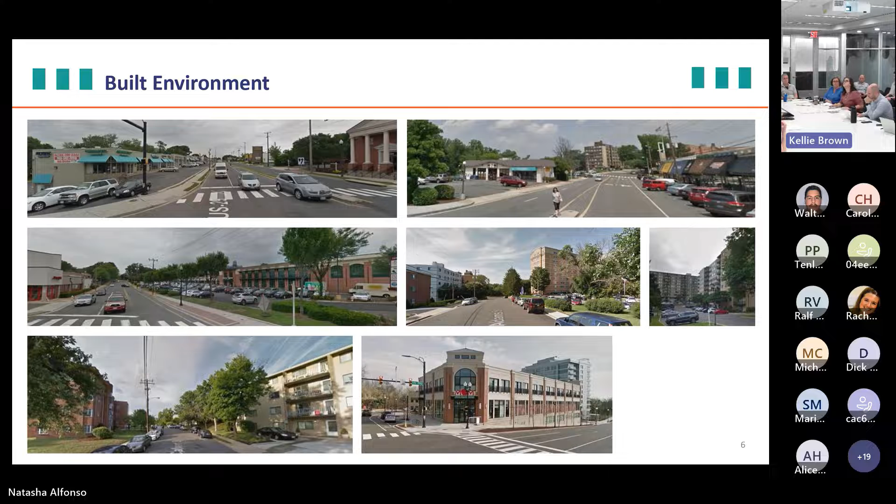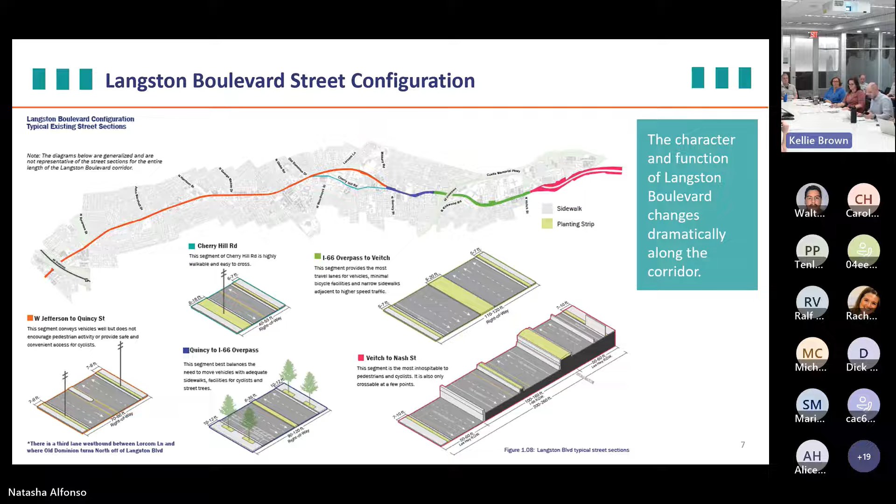There are several locations, though, where you can feel that auto orientation, that auto-forward built environment, which is one of the significant changes we would like to make over the next few years. Just by looking at the street, Langston Boulevard, from one end to the other, you can see a variety of different conditions, from almost an expressway condition in the east to very narrow roadways.

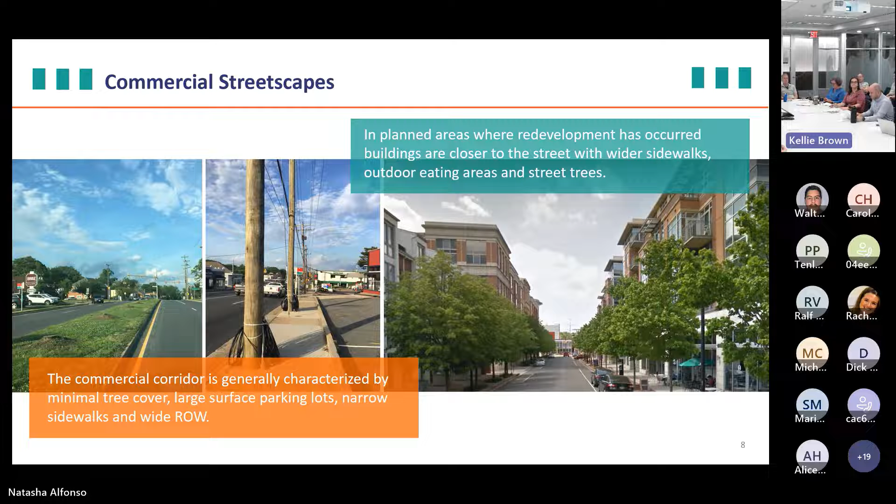And for pedestrians in particular, one of the most important constituent groups for us in this planning effort, there are a variety of conditions, but many of them very challenged. Now, we do have some examples to build on, like Westmoreland Street on the right, where there's a good example of a pedestrian-oriented environment that facilitates ground floor commercial and new residential dwellings. But on the left there, you can see those conditions that we're working with to try and change.

The residential neighborhoods along the corridor are actually quite lovely, right? The places that people live today are wonderful, tree lined, and there's lessons from those neighborhoods we want to bring onto that commercial corridor. Although there are some neighborhoods that have a lack of connectivity between them that we wanted to change, especially in Area 5.

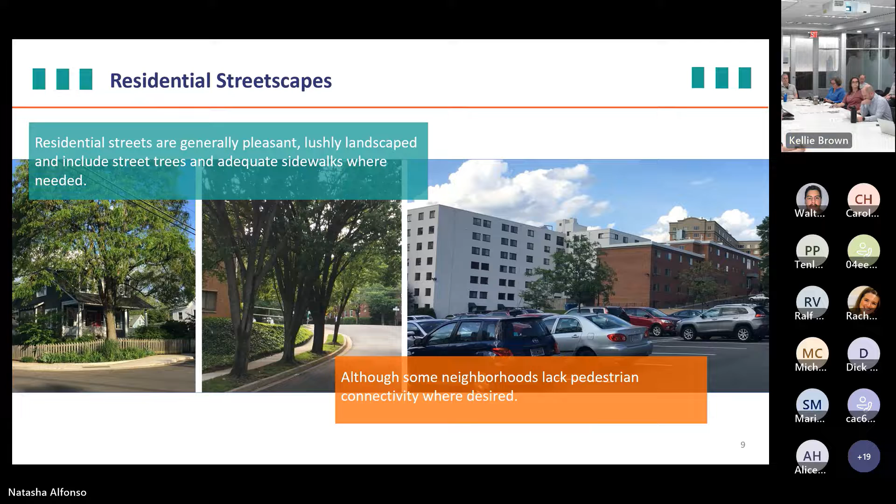So part of the process was to map the barriers or the disconnects within the public network. There's a great series of public parks just off of the corridor already, but there was a lack of connectivity along the corridor and across it, preventing people from taking advantage of those existing resources.

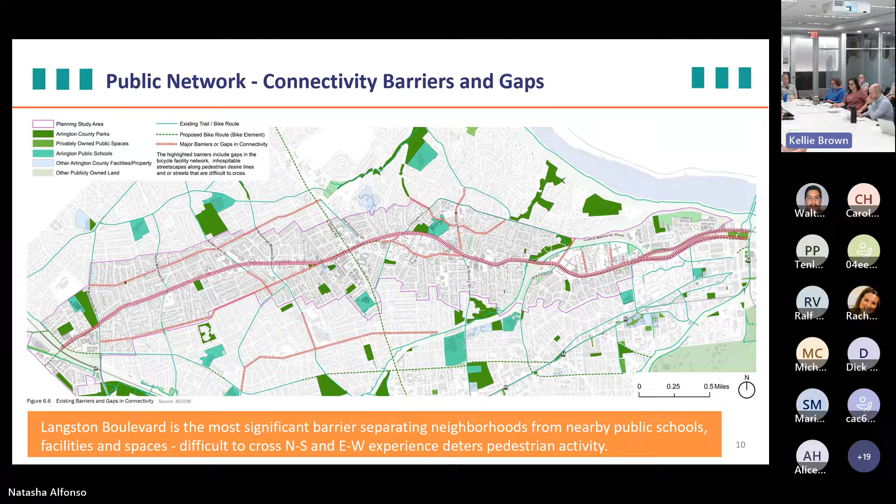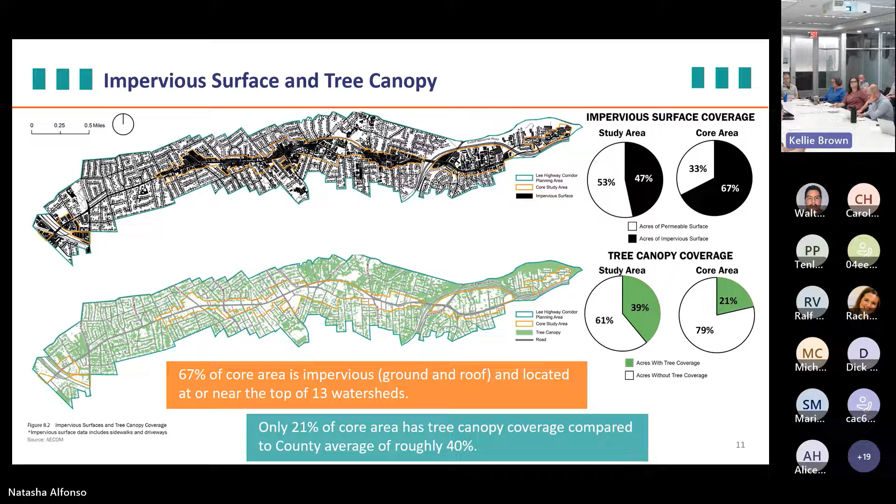As you move through it, you can see the significant amount of impervious coverage within the commercial property, and that causes several different types of challenges for our sustainability goals. Those same locations have very little tree canopy, and we wanted to make significant changes there. It's going to take the development, the redevelopment of that property to make that happen.

We were working with the staff to understand where the flood risk is along the corridor and how that tree canopy, or the lack thereof, and the presence of those impervious surfaces are exacerbating the flooding challenge.

All right, it's asking me to do a few things here. It wants me to hold on a little bit again. Just a few moments, folks. We'll see if this reconnects. Think happy thoughts.

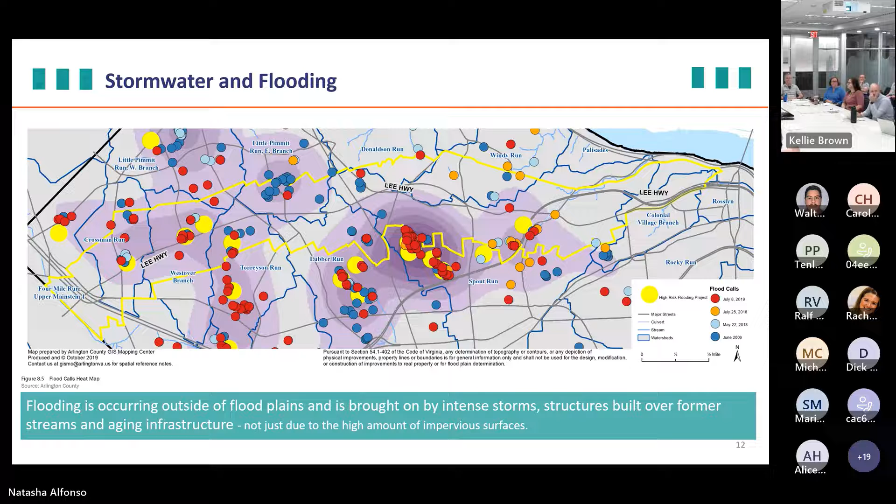Okay, it looks like it knocked this out. Trying to reconnect. We're going to try to open up SharePoint.

There you are, I see you now. Do you know where it is? No, okay, go to meetings all the way down to public, then LRPC. You're in phase 3, right? LRPC right there, 725, and it should be the last one, the PowerPoint, that one.

What should we do? We'll have to just take them to advance it.

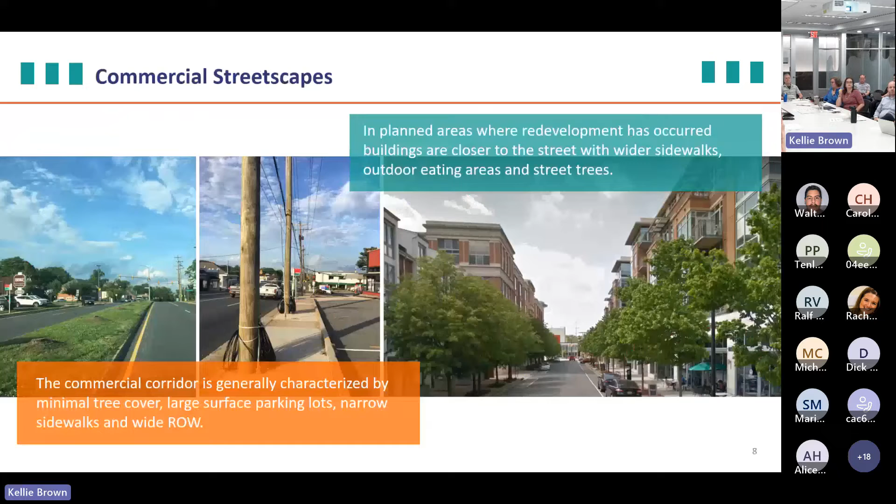One of the important things to keep in mind, and one of the motivations for the entire planning effort, is that by-right development is not resulting in the changes necessary to see realized, whether that's the lack of housing diversity, the fragmented streetscape, or the continuation of impervious surfaces. It's important to incentivize redevelopment outside of the by-right process in order to see those goals realized. So to proactively plan for change, the area plan guides those improvements and decision-making for new buildings, site improvements, and other infrastructure, and looks to incentivize development that can help transform Langston Boulevard into that walkable, sustainable urban Main Street environment we're looking for.

And to realize those county goals - affordable housing, biophilia, safety, transportation, public access, and racial equity - there are 9 different planning elements that have their own policies and recommendations associated with them. We're going to be focusing on the built environment component in this meeting, land use through historic and cultural resources.

There are design principles and guidelines also included in the draft area plan. The idea there is to provide guidance for how to do the recommendations and how to achieve the development that's talked about in the principles. Those guidelines for the public realm and the built environment are a set of recommendations for how to apply those design principles.

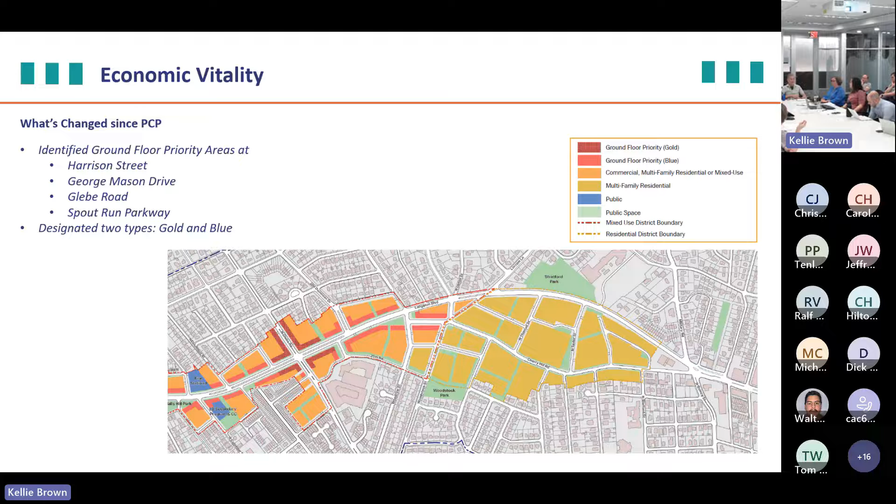So will this just be for a little element that comes in, or will it be not for by right? No, it gives an incentive that we don't have to do by right.

Let's hold on one second while we try to get back into the meeting. Now we're back? Are we back? Elizabeth, can you hear us? Michelle, can you hear us? You're back, okay, thank you.

Okay, we did not discuss anything substantive when we were kicked out. Ginger had a question. I think you're here as a commission. No, okay, never mind, Ginger. You're not allowed to, you're trying to sneak in.

Still have comments at the end. Okay, you'll have a comment. Yes, ma'am. Yeah, it just, again, recognize that concern, and it probably is a countywide policy of how to actually encourage small local businesses. I mean, that's the broader issue.

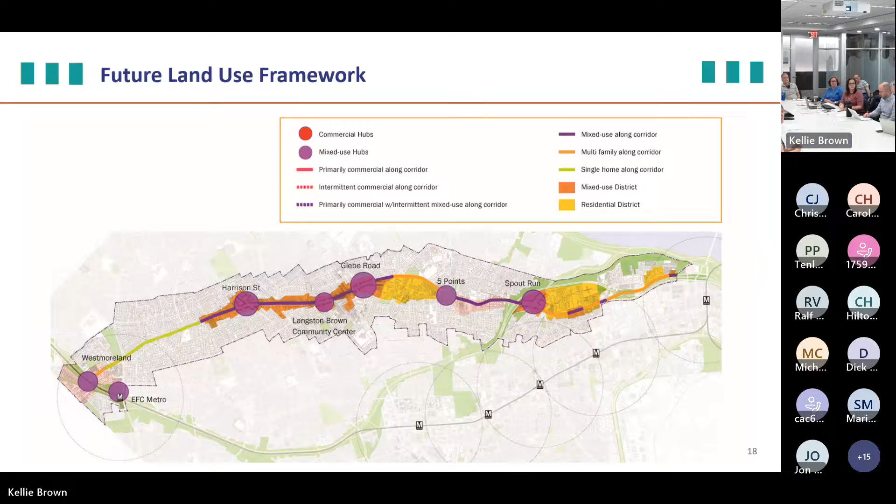All right, so we're going to focus on housing now. It's visible, right? Everybody can see the tiny little thumbnail slide. Yes. Okay, all right, and hopefully when I articulate on the screen there—

The policies on housing in the plan really focus on increasing housing choices and supply, particularly committed affordable units. The primary recommendation is to encourage or concentrate residential development in the core by allowing residential in commercial areas, which we know is not allowed today, and by increasing densities throughout to increase the supply of housing, particularly multifamily. I know we've said that a couple of times, but that is the key.

The plan sets policies for increasing committed affordable units, which are units affordable to households earning up to 60% of the area median income. This can be achieved a number of ways, including redevelopment and infill of sites that have existing CAFs on them, through renegotiated agreements to extend the terms of those existing CAFs along the corridor, and through the conversion of existing MARKs to CAFs. And as we know, MARKs are pretty vulnerable.

Many are in aging buildings that at some point may be renovated or redeveloped, and even if that takes a long time or happens over a number of years, in both cases changing those units will lead to rents increasing and no longer being affordable to those households. Another way is by incorporating new units on historic sites designated for full or partial preservation. Lastly, the plan establishes a policy to accommodate renovation of aging residential buildings in order to sustain those MARKs, at least until property owners choose to redevelop or take advantage of the options available under the plan.

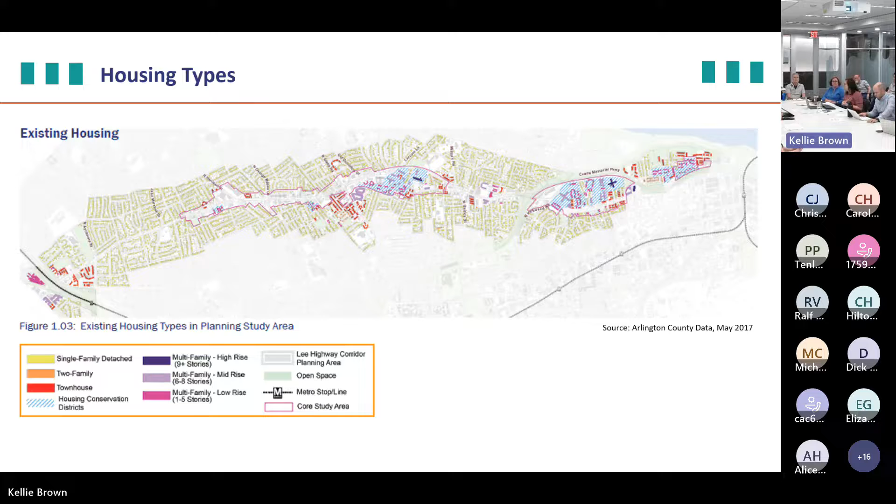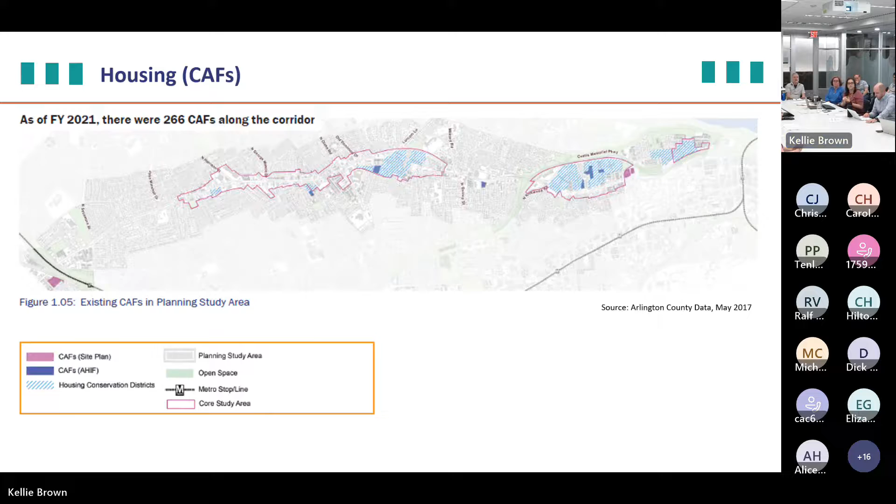So with that, we have a couple of maps. Kelly, if we can, sorry—just scroll through them. They provide some context of what's existing along the corridor: this is the housing types, then the MARK and CAF units along the corridor, and then one more showing the breakdown of multifamily units along the corridor—which are apartments versus which are condos. So if we need to refer to that, we're up here.

All right, questions—this is a hot-button topic, I'm sure. I've got to go to my friend Nia here.

In the more highly developed corridors of the county, we struggle when developments come in with the site contribution, the cash contribution, or on-site units—it sometimes seems to be a losing battle to get on-site units. At least up until now, historically, from what I've seen in the county—maybe not on Langston—but the developments that come in usually are market rate. We've seen that on Columbia Pike. My concern is how we're planning, especially if we're talking about equity. Equity is not going to be achieved unless there's a lot more affordability; it's not going to happen. So my concern is that we haven't been able to achieve this in places in the county—so what makes us think we can here, or what is it about this that's going to enable us to achieve it better?

Because my concern is that at the end of the day, they can still make a cash contribution in lieu. That's an important component of the affordable housing program within the county, but it doesn't serve the purpose of getting more affordable units into that corridor to achieve the goal. Right.

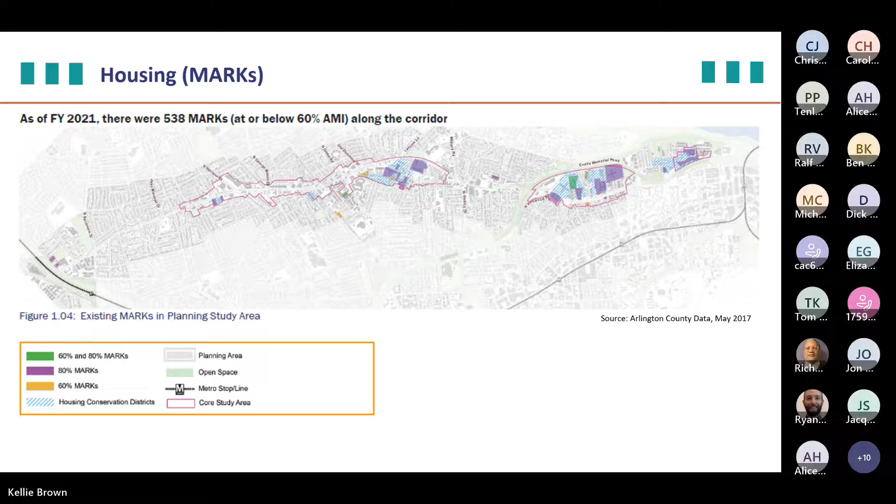It's me again, I just have a question. So the affordable residences, condos in the target areas, when they renovate, what measure is in place so that the poor people who are currently there aren't pushed out? Because renovation costs a lot of money, and if people come in and start throwing money around, they expect a big return. So monthly fees, something's going to go up somewhere.

Excellent question, and that's the type of thing we're going to have to sit down and figure out. If we want to preserve these affordable ownership units, we should figure out some new programs. Absolutely.

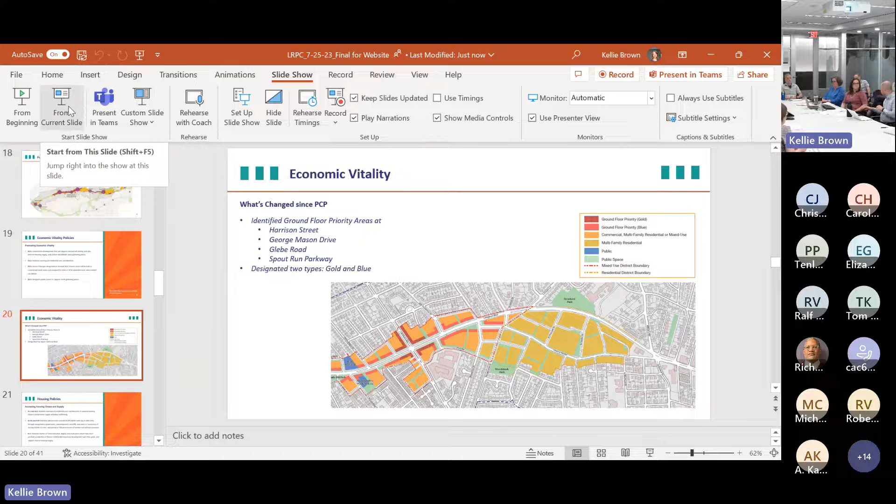Eric, I have a couple questions, very quick. Tasha, this is probably you. In the recommended land use changes, I think this speaks to some of the preservation conversation. There's a note about maintaining the low-medium residential designation in certain locations. From what it sounds like, where we already have this low-medium housing, we want to just maintain it. I think it speaks to the conversation we were having before about incentives. We had this on Columbia Pike three and a half years ago when we were looking to maybe change the form-based code, where there was a concern that if we allow more density, we might incentivize the current owner to say, great, it's time to cash out. Is that sort of the idea here, that what's close to market-rate affordable, we just want to leave as is?

It's a good question because it really depends on the site. Okay.

I think one of the challenges we have along Langston is we don't have regular square or rectangular blocks that are deep and consistent along the entire 4.5 miles. You can see by the shape of those neighborhood areas that the lots are irregular. A good portion of the corridor, at least all of area 2 and part of area 3, the lots are very shallow, and there are a million of them, little small lots.

So it would require consolidation. That map is actually pretty helpful because it shows at least how it looked along the corridor. It's different today. There are actually more marks today than there were when we did this map, which was the data for 2017, but generally that's where they are.

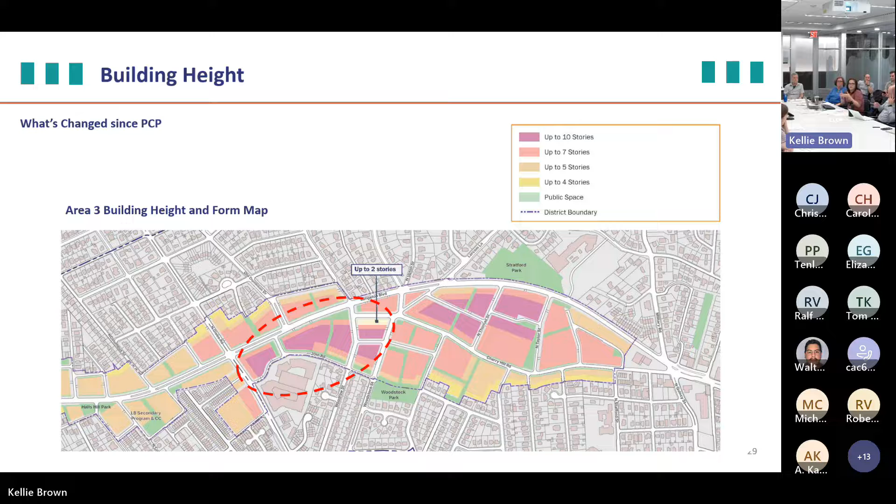But we do for the portion west of between Glebe and Woodstock, where we're being intentional. So I think we have to clean up the language so it's crystal clear what matches the plan. In most cases, we're trying to create a base of 5 stories that steps back beyond that, wherever you're near low density residential edges. But if you're inside the core area, somewhere that gets completely redeveloped with no low density residential, then you could potentially come to the build-to line.

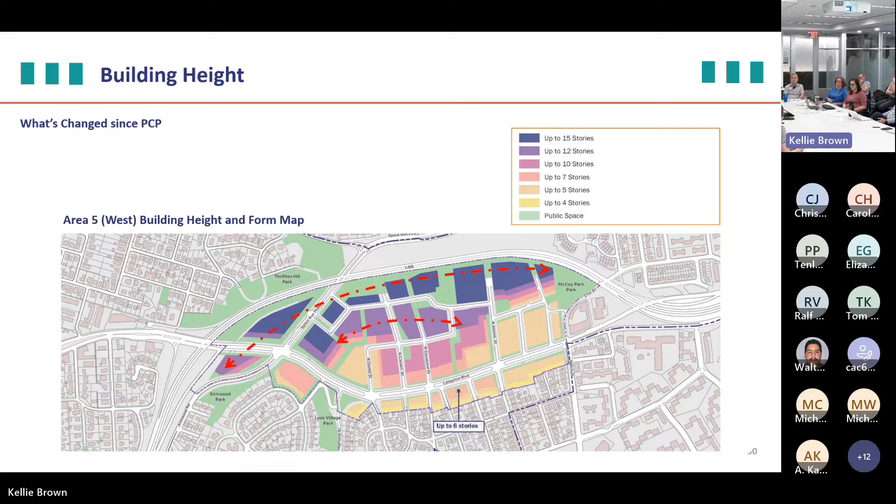Thank you. Any other questions or comments on this topic before we move into implementation?

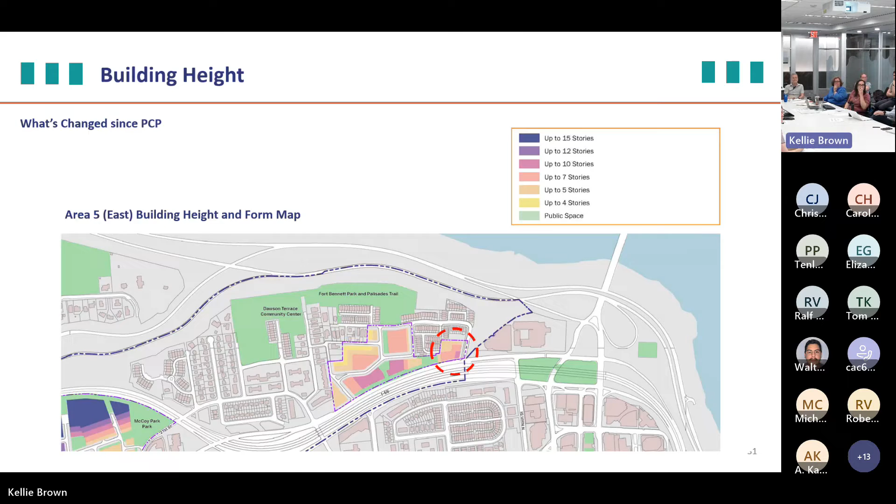It doesn't work anymore. The next one, she broke it. Oh, you went back though. But see what I mean? There we go, I missed it. You missed it, right there.

There we go, okay. I will cover this information. We are still working on our implementation strategies, but within the draft plan. Kellie, move.

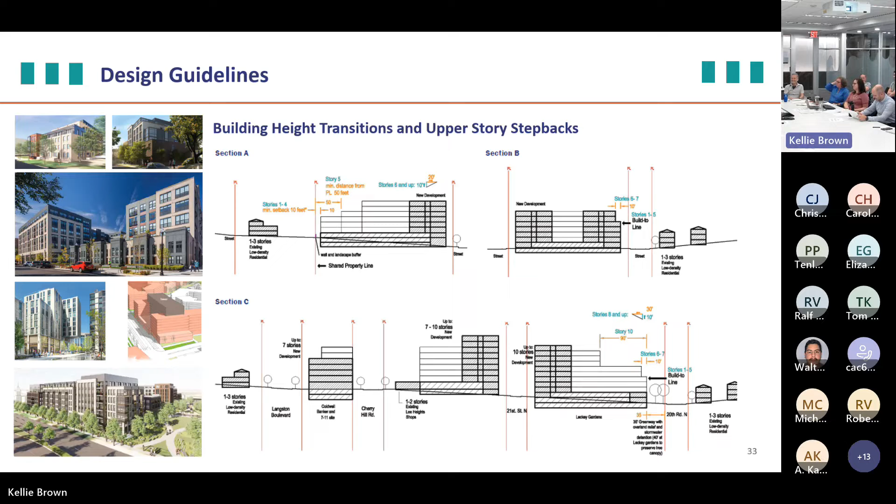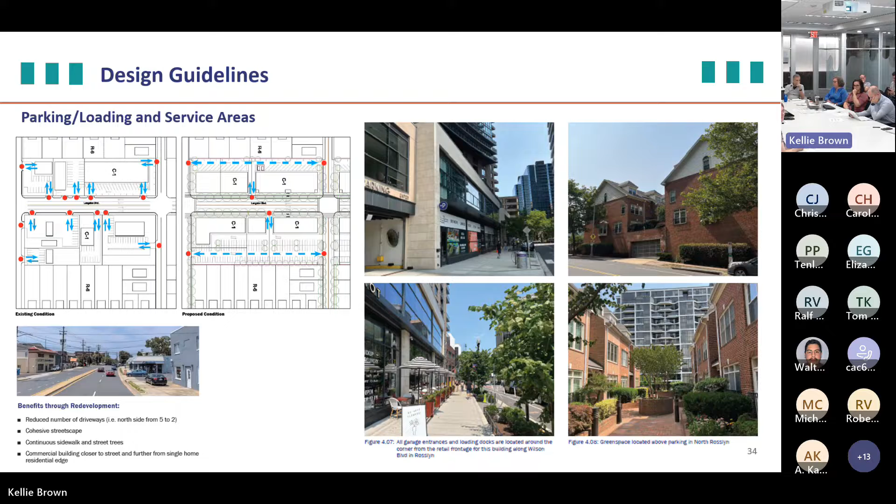We touched on this a little earlier with one of the questions. We are planning to add a planning district to the general land use plan map, which we'd call the Langston Boulevard Planning District, and insert information into the GLUP booklet's vision, goals, and key policies. With that planning guidance, we believe that would be a replacement for what we were showing with the Housing Conservation District for a number of areas along the corridor, and this plan would be referred to for planning guidance there. So we would be removing the HCD boundaries where they overlap with this new district.

But there are two areas along the corridor outside of our area here: some of that is in the Halls Hill/High View Park neighborhood, and some is in Area 5 East. Those would remain in place, and we'll continue to work on what is now no longer called the Housing Conservation District Study - it's the Multifamily Reinvestment Study. When we're able to resume that and bring the process to closure, we'll confirm how we want to handle those areas on the GLUP moving forward.

We are expecting to indicate land use designation changes to effectuate this plan and vision. We're discussing internally how far to advance those amendments, whether proactively on the county board's own motion or incrementally with redevelopment applications. We'll have more information to share on that, probably at that future meeting in September.

Another aspect of the general land use plan that we've signaled, an outgrowth of the expanding housing choice process, was to adjust the Cherrydale planning district to remove several lots adjacent to sites that actually did develop under the Cherrydale revitalization plan.